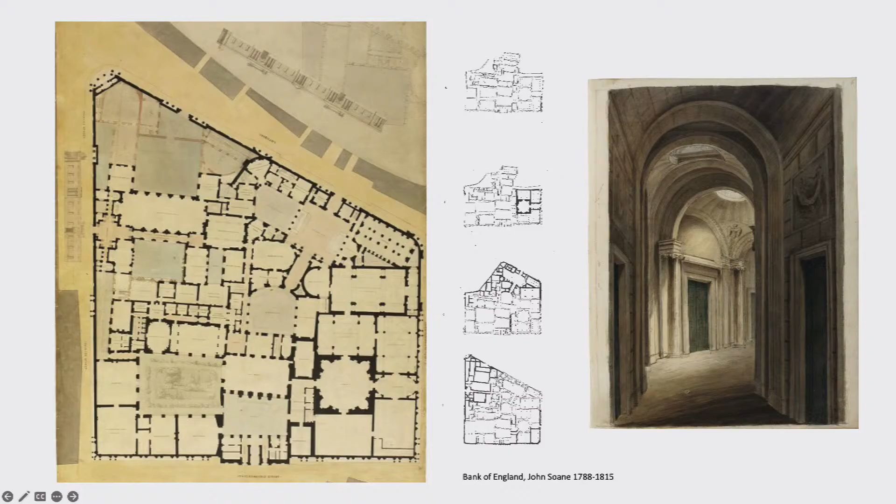I always think that Soane was a kind of revolutionary. He was given the commission of the Bank of England, at the time in the 18th century a powerful expression of control, and he designed a building of great mystery and theatricality. It's a project that, when you understand its evolution, sets up a series of spatial episodes, a combination of the grand gesture and linking passages and, let's say, the unknown.

I wanted to read this statement to you. Setting ourselves the task of rethinking architecture in the early 1950s, we meant by 'as found' not only adjacent buildings, but all those marks that constitute remembrances in a place, and that are to be read through finding out how the existing built fabric of the place had come to be as it was. 'As found' is above all the property of a thing, not the thing itself, and not the activity that produced it. A statement very typical of the Smithsons, somewhere between poetry and critical observation.

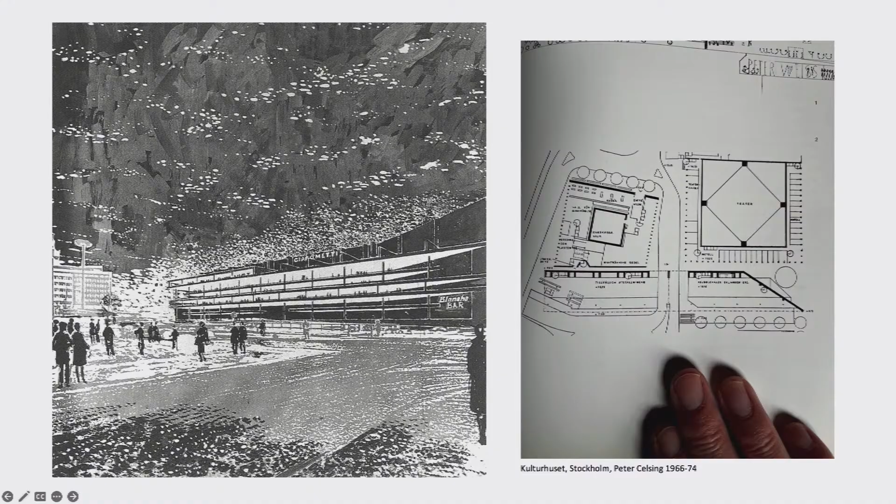In these wonderful collections of essays, he refers to Peter Celsing's Kulturhuset in Stockholm, built in '66 to '74, a project that maybe many of you have visited. I didn't show you the finished building, but you should know it, and if you don't, you should visit it. These were the drawing on the left, from the competition. The drawing on the right demonstrates the combination of buildings, but the long bar that faces the main square. He really was exploring ideas of phenomenal transparency and flexibility, as well as ultimate utility. The thought was that everything could be accommodated or projected within this interior. Everything can be seen simultaneously. We're talking here about the mid-60s. There was free movement from space to space.

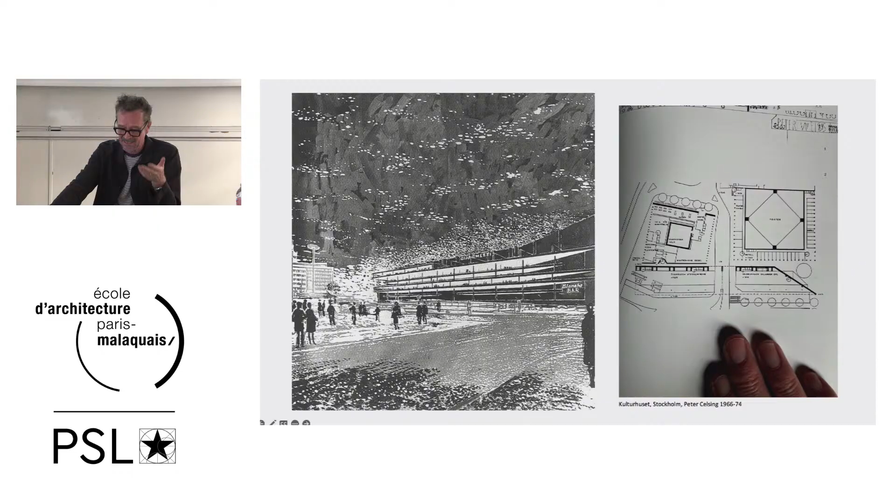And the director of Kulturhuset was Pontus Hulten, who then became the director of the Pompidou. He also believed in the interaction and the agency of people, the public, the freedom to see, the freedom to act, the freedom to intervene.

Mark also refers to the Fun Palace, an unbuilt project of Cedric Price, commissioned in '61 by the theatre director Joan Littlewood. Here the building is seen as a stage. The users of the building could do anything they wanted within the framework of an adaptable structure, with roofs and components that could appear, move, or disappear in response to need.

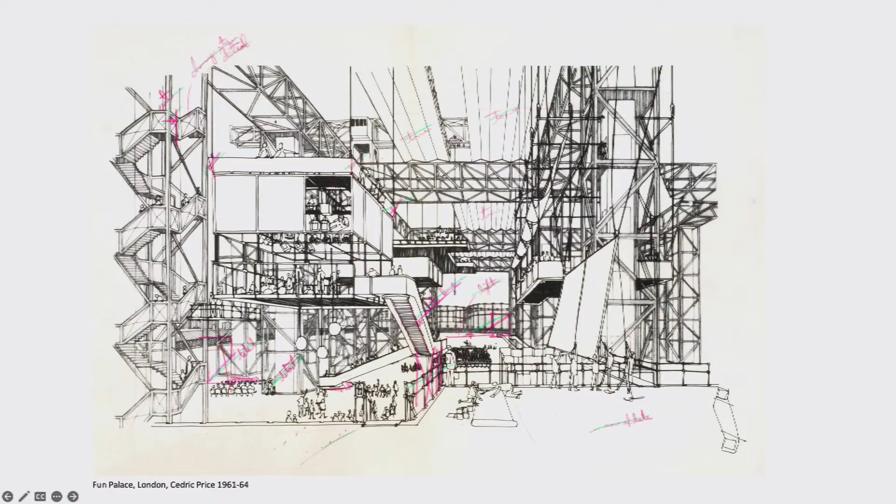There is inevitably, and in a way maybe the first time, a conscious interest in the self-participatory aspect of public architecture. It's also indeterminate, and it also is empty. And I think it was the precursor of Pompidou.

And the third reference that holds importance both in Mark's writing, but in a way what I take from his writing, was of course Sesc Pompéia of Lina Bo Bardi from 1977 through to '86. Again, these projects are 10, 15-year projects. This is extraordinary, how she managed to change and to charge a collection of existing buildings by the reuse and indeed the misuse of what existed.

Emptying out, creating clearings, enabling routes that could be claimed, could be reinterpreted and put to new uses. It is an architecture of simple structures, where the new added work is simple. It gives the impression that almost anyone could build what is added.

And yet the factory, as a consequence, is transformed from a place of work, and you could say from a place of oppression, into one of social interaction. And I think this project led to the Tate Modern of 2000, but also maybe to Frac of Lacaton-Vassal.

All these references show the transformation of a structure of necessity into one that has represented a freedom of use, of movement and association. You could understand it as a sheltering structure given over to new uses, behavior aligned with a feeling of clearing in which public life could be made anew.

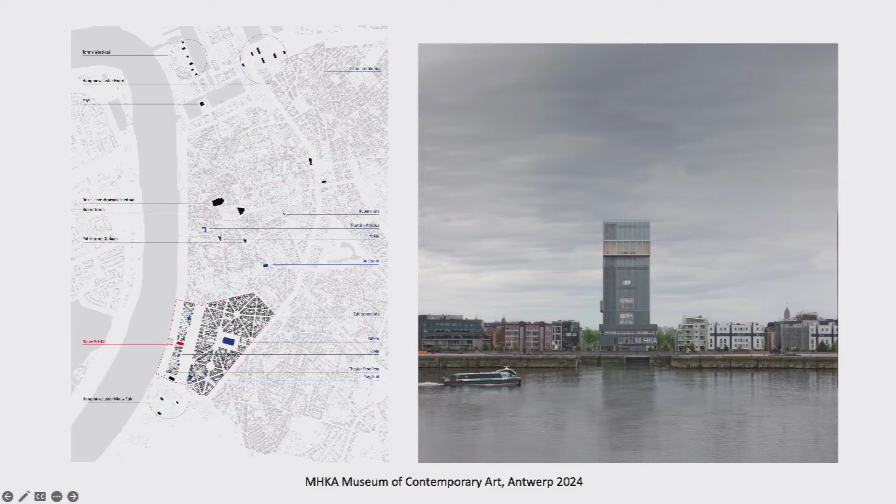They were housed in an existing building which was not conceived as a museum, and they were very local in their attitude. And yet they developed a new brief under new directorship with new ambition, an ambition to make a tower, a vertical museum. A vertical museum, you know, it lies against all typologies, it lies against all references.

A site that takes its place on the edge of the river Scheldt, but within the cityscape of Antwerp. A tower that could be, in our eyes, likened to a harbour silo, which visually asserts Antwerp as a city along the Scheldt, a city of fashion, a city of art. But it could also be a symbol of production, resembling a crane or a tower, but resembling the pride and the skill of the different guilds that the city of Antwerp is so known for. In other words, it could be an addition to a powerful tradition, and it could have a personality.

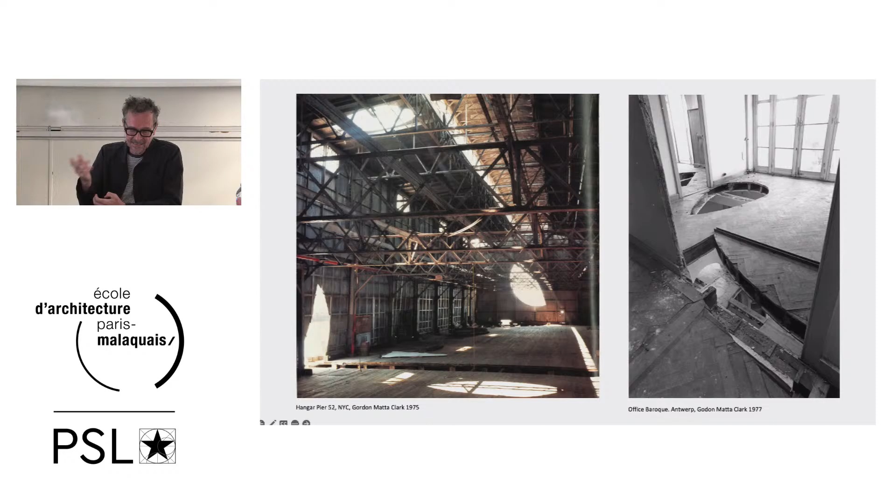In 1975, the artist Gordon Matta Clark created, on the left-hand side, Day's End, by illegally cutting large sculptural openings into an abandoned industrial hangar on Pier 52 in the harbour in New York City. Office Baroque, on the right-hand side, from 1977, was the result of an international invitation by Antwerp to create a similar project, but in an empty office building opposite the city landmark, Het Steen, which is like a castle.

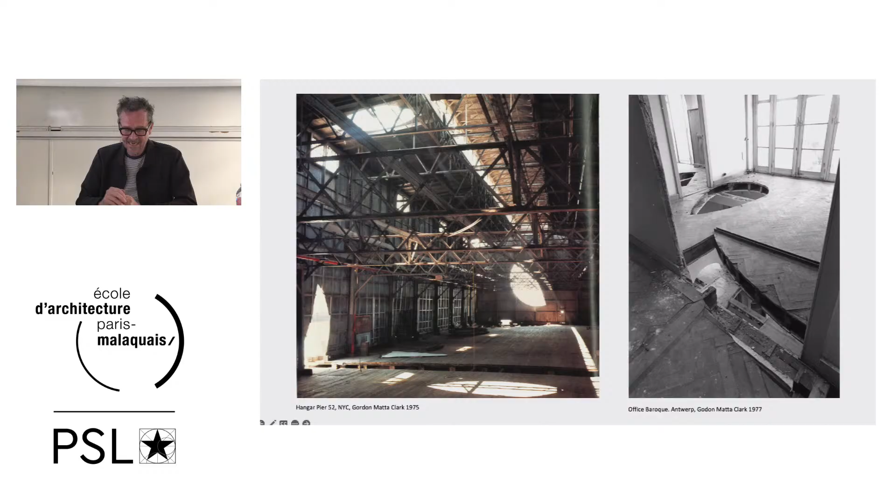After Matta Clark's premature death in 1978, a foundation was created to save Office Baroque. And while the building in the end was demolished, the donations collected from artists for the foundation to save it formed the basis of the M HKA collection. In other words, Matta Clark is deeply connected to M HKA. His work, as you know, or if you don't, you should explore it, is about cutting, but it's about connecting.

The plan that we propose in M HKA was also about connecting. It was built on the ground, the building bridges two parts of the city, the River Scheldt on the left-hand side and the South Park on the right. It is porous, it's accessible from all sides. The public space flows in and out. It has multiple entrances, it's connective.

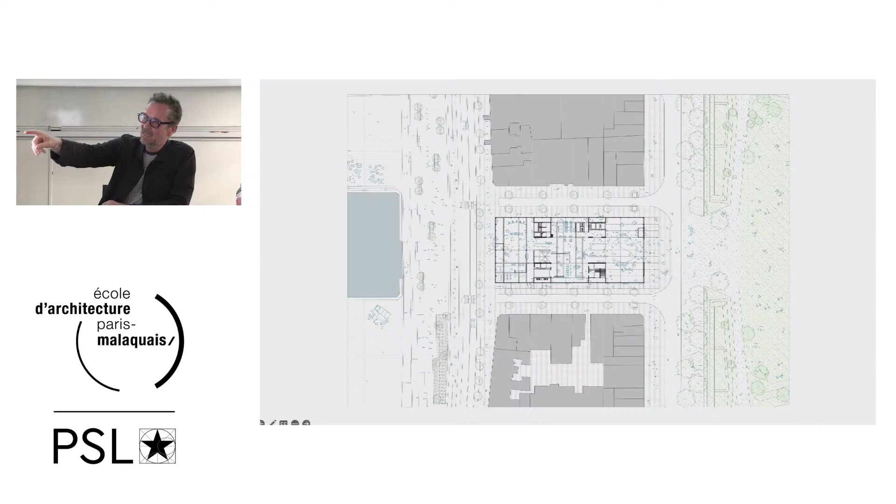It's the size of a city block, and it demonstrates a plinth which is public, a plinth which reaches out and draws in. It also, in fact, in our proposal, had a barge that was moored on the river. And so the museum, through this flexible barge building, on a building on a barge, would be able to sail into the city centre. So the art could come to the city, not just the visitor come to the art.

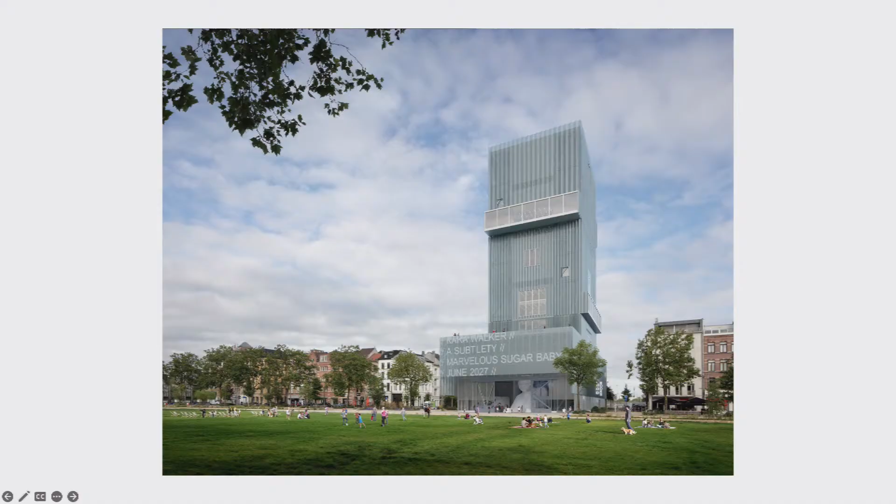This is a place, we thought, that opens itself to the city. There are no thresholds. So unlike the traditional museum that sits on a platform, the ground floor of the museum is at the ground level of the street.

It offers a generous exhibition hall, which we call the hangar, a spacious public hall where everyone is welcome, a space which is both for production and for presentation. And above this hangar, this plinth, an 80-meter high tower forms this powerful ensemble. You could say an ensemble that is more an infrastructure. And you can see in the image a piece by Kara Walker, an opportunity in this hangar to show extremely large work.

I mention this infrastructure because we saw the building as an infrastructure. We presented it at the final jury as an unfinished building, an offer, an opportunity that lies in 6 mega floors with primary and secondary structure that gives flexibility of content. It can be arranged in different ways due to the symmetrical construction of floor heights. And it's visible on the waterfront as an infrastructure.

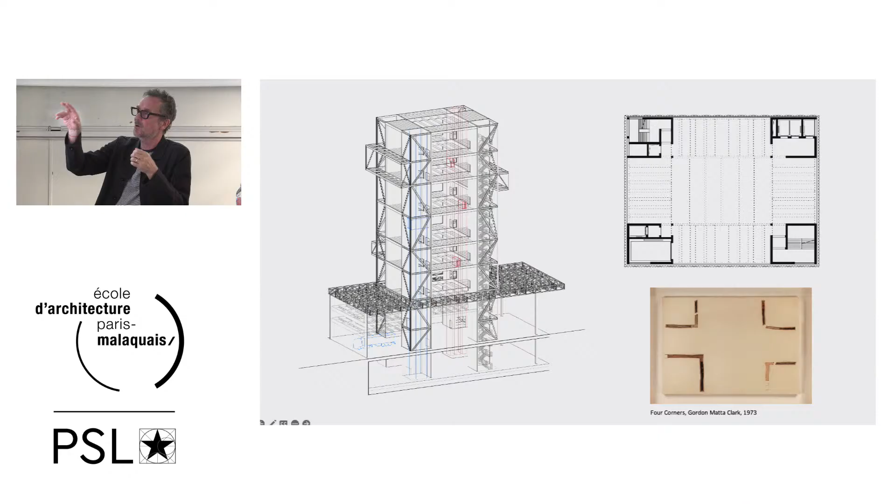Combined with, on the left, you can see in red, a kind of plug-in, decentralized HVAC system. So you could control the environment, the climate of individual floors. I mean, you have to remember here that a museum is the most unsustainable building type that exists. I'll come back to that later.

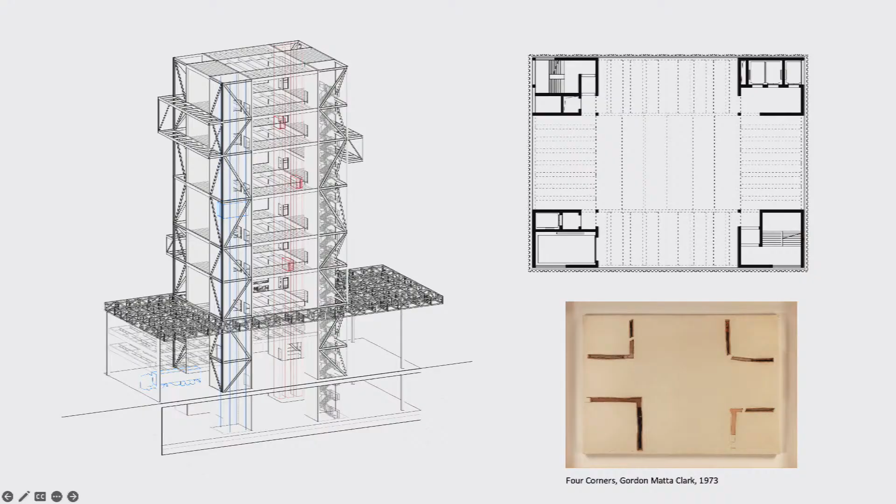The hangar at ground floor offers an immediate encounter with art. It is multi-directional, it's 70 meters by 30 meters, divided into 3 sort of spatial areas. There are no escalators. It shouldn't be a symbol of consumption, but a symbol of production. It's 16 meters high at the front, 12 meters in the middle, 7 meters at the back.

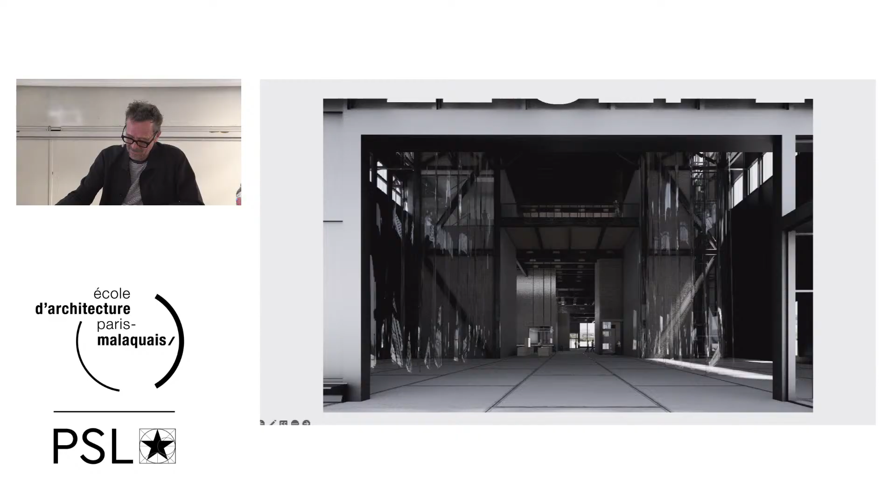And from the central vestibule, an internal window reveals the basement gallery below. These sections show this idea of a primary and secondary structure and a typical way of arranging that structure, giving spatial opportunity for exhibitions to be organized in different ways, working with this 12-meter high primary structure.

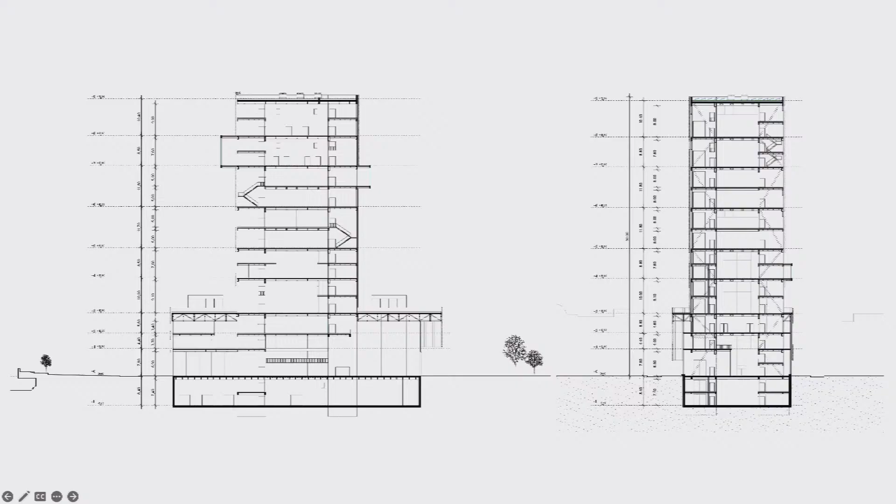And on top, this structure straddles over an existing water lock, which is preserved as a found relic, but in fact it's a gallery, an underground gallery with no daylight.

In this sectional perspective, we poured the brief into the structure, the program offered at the competition, because we knew it would change. We felt the building was too big for the museum, their ambition was unrealistic. So we demonstrated how their brief could occupy the structure, but also revealed other ways of using the building alongside a place for art.

You can see the auditoriums stacked on top of each other, all forming part of a journey, a route, with at the time the permanent collection, their most treasured possession, on top of the building, and the temporary galleries above the auditoriums with overflow spaces between.

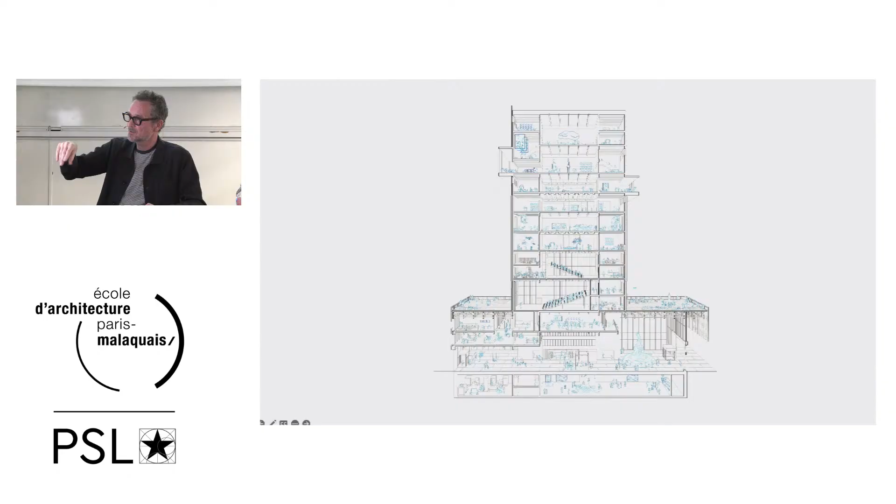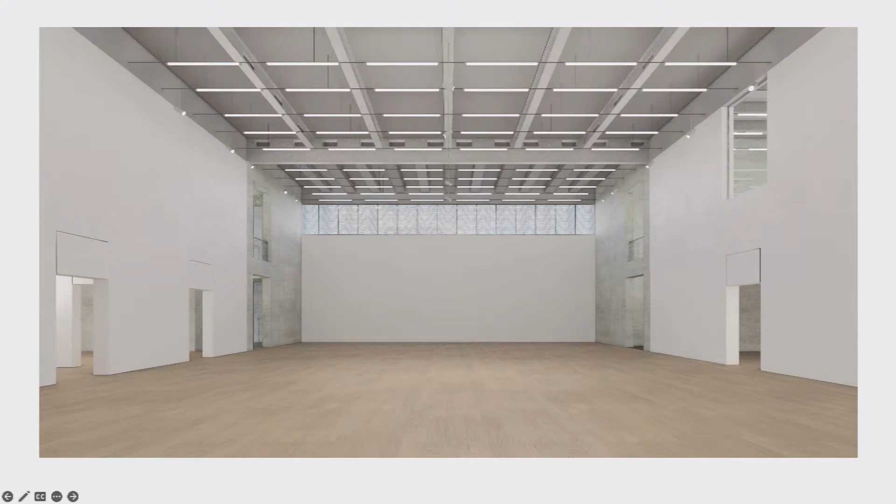On the top two floors, we presented these shell-like spaces. You can see on the right and left, in concrete, the open corners, just to reveal that to those looking at the image, and a typical arrangement using the permanent collection elements.

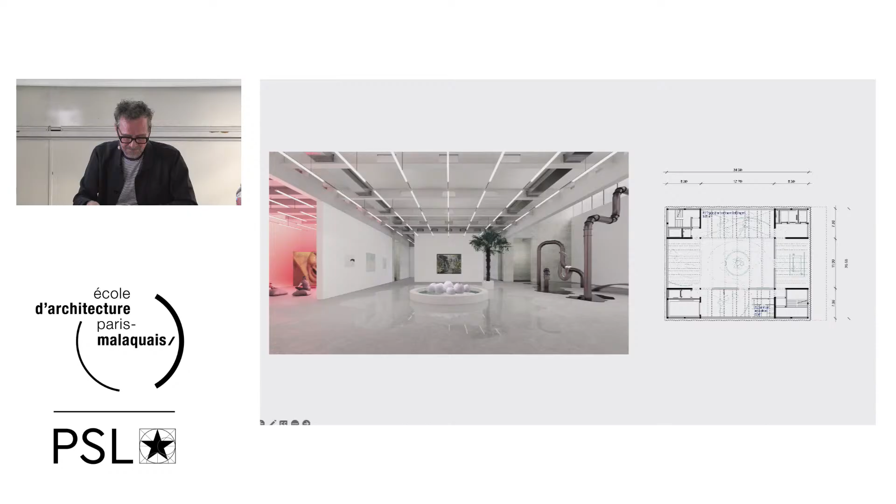In the middle floors, the more transient gallery spaces that could take the visiting exhibitions. The facade, a veil, which grew out to create overflow spaces and open corners in the staircases, places for visitors to pause mid-visit, to reorientate, to meet a friend or so.

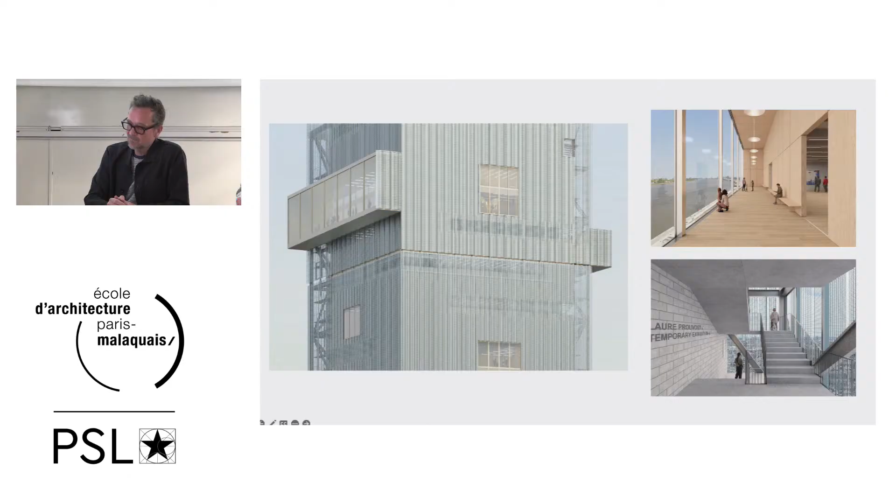The facade comprised three layers: an inner layer of hygroscopic heavyweight block, visible in the stair, to provide thermal stability and moisture buffering, a middle layer of insulation reducing temperature change, and an outer layer of perforated metal sheets upcycled from waste material from the dock industry, acting as a veil providing shade and wind protection to the thermal enclosure.

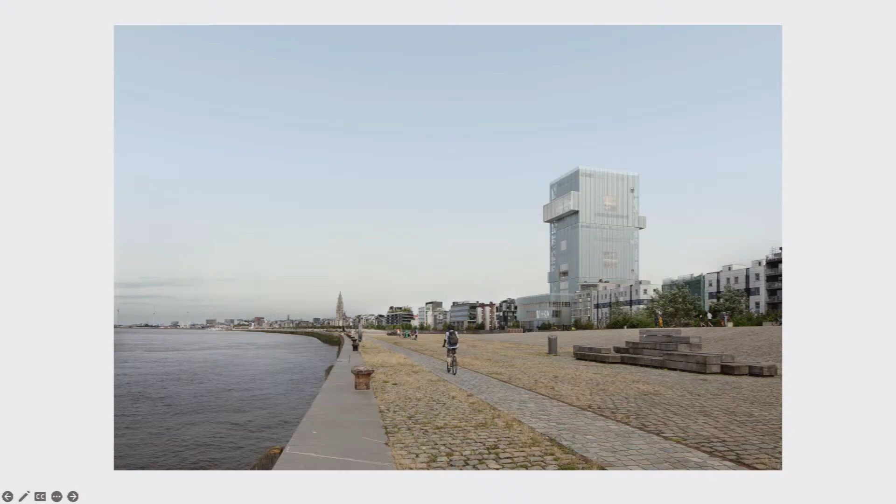It's a facade that presents itself as a symbol from afar, a brightly colored container. At night, open, a public destination, perforated, revealing its interior. And close up, a layered, open facade, reaching out, drawing in.

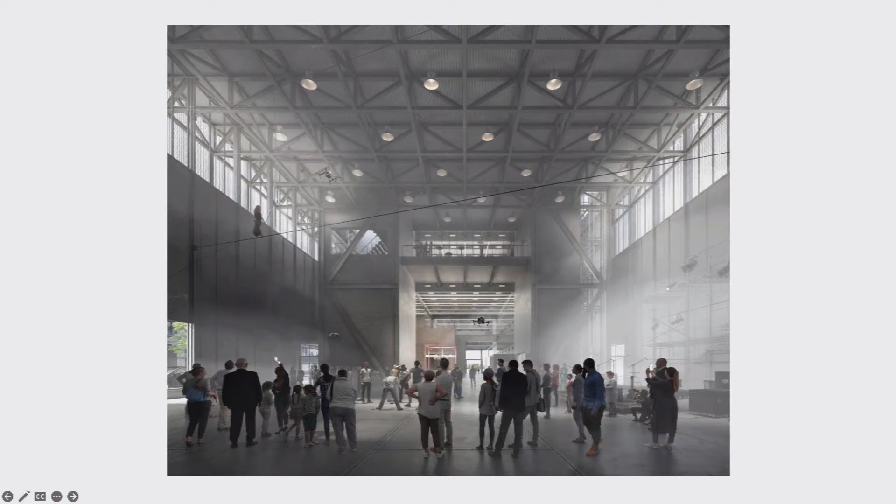In this image, you can see the plinth measured at the scale of the existing housing. Streets either side provide some of the many entrances. And within that plinth, the hangar, which embodies openness. It's vast and flexible and unpretentious, and it invites spontaneous encounters.

We imagined that the hangar, and by extension M HKA, was a civic third place where art intersects the city. And I think these kinds of porosities redefine the museum as a lived infrastructure rather than as an isolated cultural container.

The second project I wanted to show - I didn't explain, but the first project was made in collaboration with the same team who are building KANAL: noAarchitecten from Brussels and EM2N from Zurich. Our collaboration has been so fruitful that it naturally followed into other collaborations, and that was another opportunity.

This project for the Leuven Performing Arts Building is being carried out by our own office, but together with a technical architect from Antwerp.

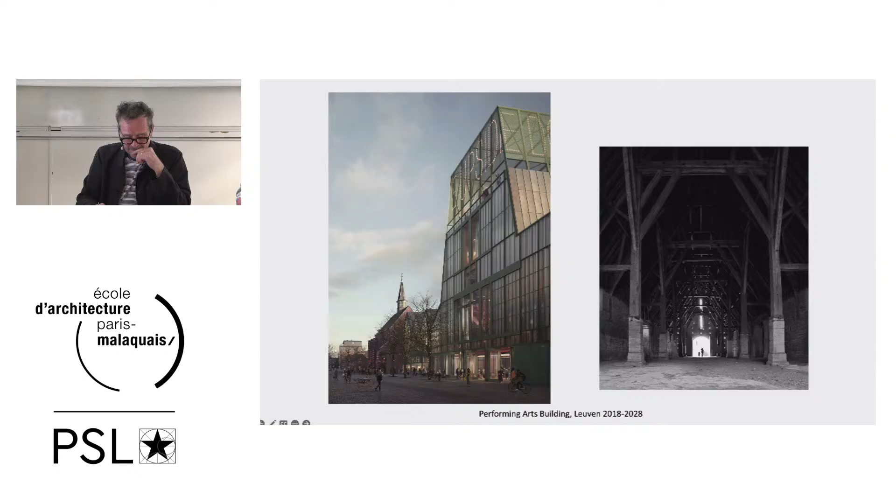It resembles an open market hall. It presents the idea of a flexible and adaptable infrastructure with a kind of resilience of a barn. On the right is a very important barn to me, the Great Coxwell Barn, a building I think was the first bit of architecture I ever encountered as a young boy with my father.

But we imagine this theatre or building as a hard-working tool, a structure and a hull. It was robust in its form. It had a crafted lattice structure and delicate outline to the sky, because it needed to be a landmark. The city wanted a landmark.

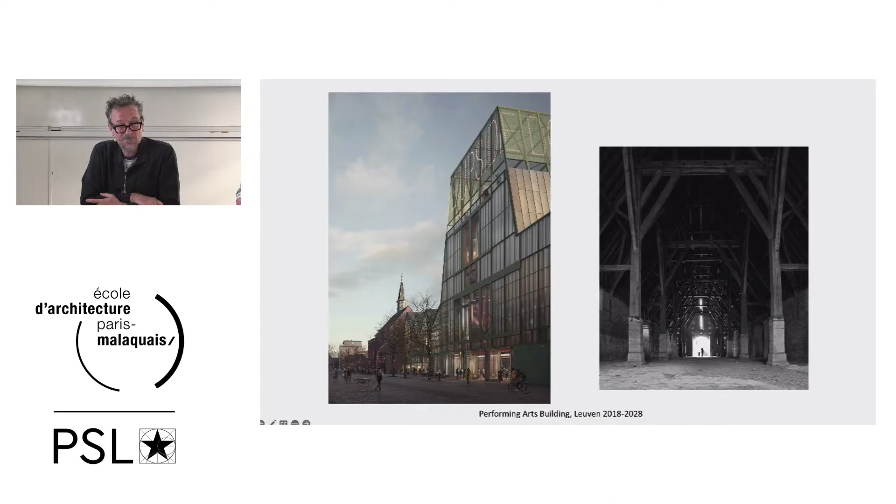This is new to us, how to make landmarks, when, as Margot pointed out, our instinct is always for quietness. This needed to be a point of cultural orientation along a cultural route.

The Flemish theatre critique Marianne Van Kerckhoven describes the theatre as in the city, and the city is in the world, and the walls are made of skin. She was indicating that the theatre is porous. It should be breathing and intimately connected to society.

And the new building that one makes is adjusted and molded to resonate with what is around, while generating extraordinary spaces. We were looking carefully at references, especially the Teatro Oficina of Lina Bo Bardi and Edson Elito, in which the street is allowed to invade the scenic stage. It blurs the boundaries between the stage and the audience.

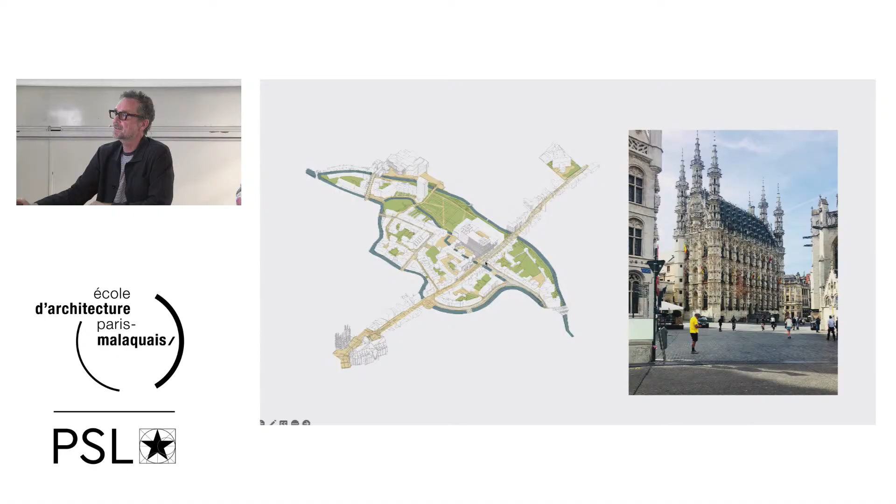In a similar way, the new theatre is designed to expand into the public space of the city, reaching out, drawing in, dissolving the thresholds between the public realm and the space of the theatre. The theatre is here along the main Brusselsestraat with the Stadhuis illustrated on the right, alongside a new park that's being developed at the moment.

A building by David Chipperfield here, and in fact we've just finished a building here.

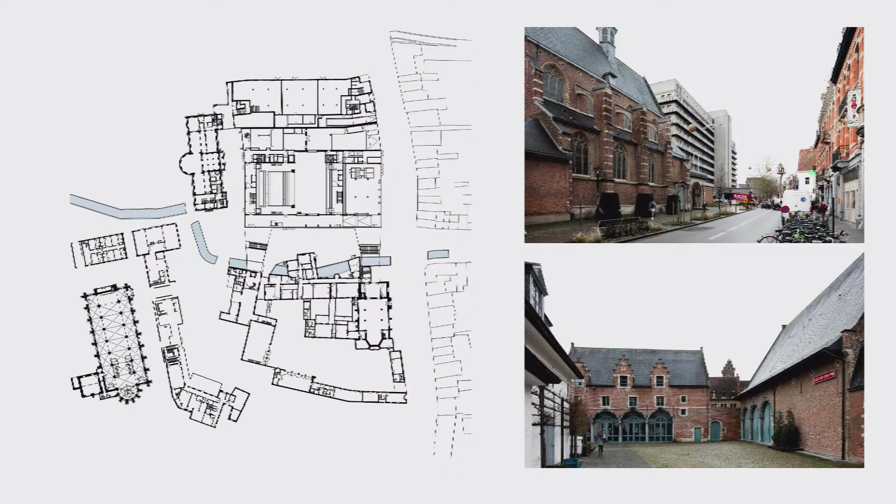We were really interested in how in this medieval city of Leuven, an ancient university city with many historically religious buildings, monasteries, cloisters, churches, how beautiful they are stitched together into the city. They create extraordinary character through the spaces between, the linking spaces, and we were really interested in how we could extend those spaces from this Romaanse Poort monastery.

This is the theatre here, and an adjoining housing development with an existing building here, an existing church. How we could create an extension of the public spaces between, from courtyard to passage to alleyway, creating a kind of cross-fertilization, in particular between this Romaanse Poort monastery, which is now an art centre, the 30cc art centre, and the new building, and indeed this church, which is used by a circus company for rehearsals.

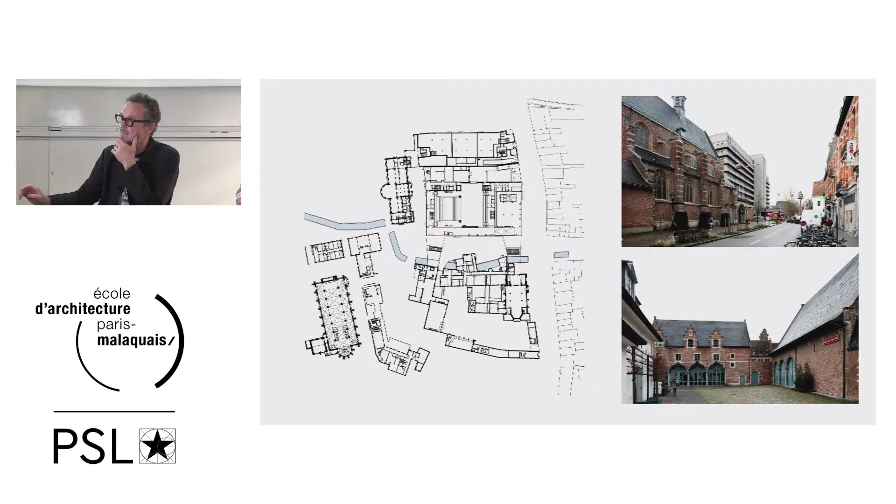Together with those cultural connections came an interest that the city had, that we were very happy to help with, to open up the river Aar, which is a tributary from the main river in the city. So this is all at the moment underground, but the intention, it is already now open through the work that's the early work before construction of the main building starts, but this extension of the network of water space.

The facade of the new building kind of unwraps itself from the existing monastery and rises to form this profile, in a way, therefore, achieving a kind of continuity with the main Brusselsstraat street running along, if you could say, a cross-section through the city.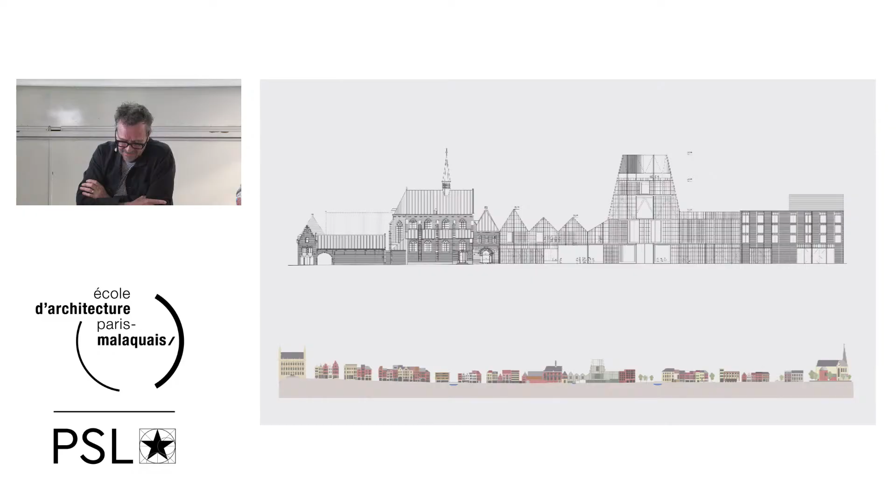And these undulating roofs and bridging elements connect new and old at the first floor level, and they therefore provide, in fact, integral accessibility that didn't exist in this building. So there's a kind of, not only there's a cultural connection, but now a physical connection that allows the theatre and the art centre to form a single unity.

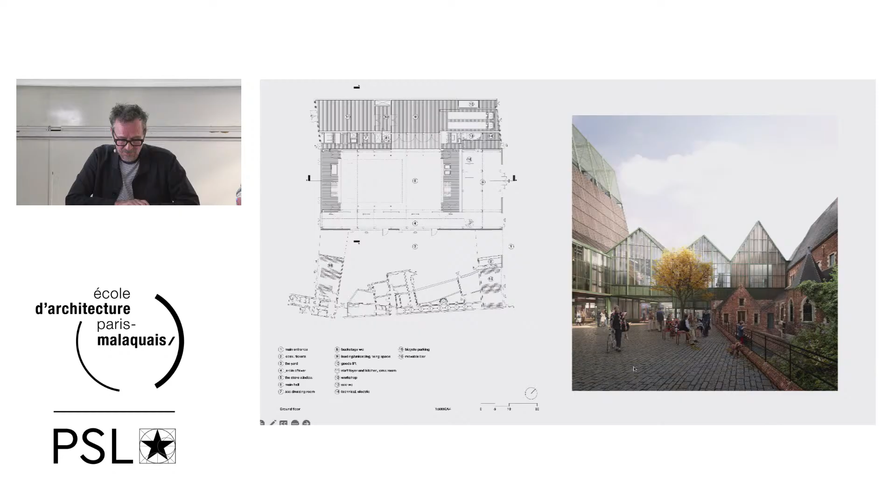Between a new yard, so this is the plan of the theatre, the river, you can just see the river opening up here, and this new courtyard, which is illustrated on the right. And what this yard did was allow us to open up the theatre along its long edge, which is extremely unusual, where theatres are usually progressively linear in their organisation, from the street to the tickets to the bar to whatever, toilets, into the main theatre space.

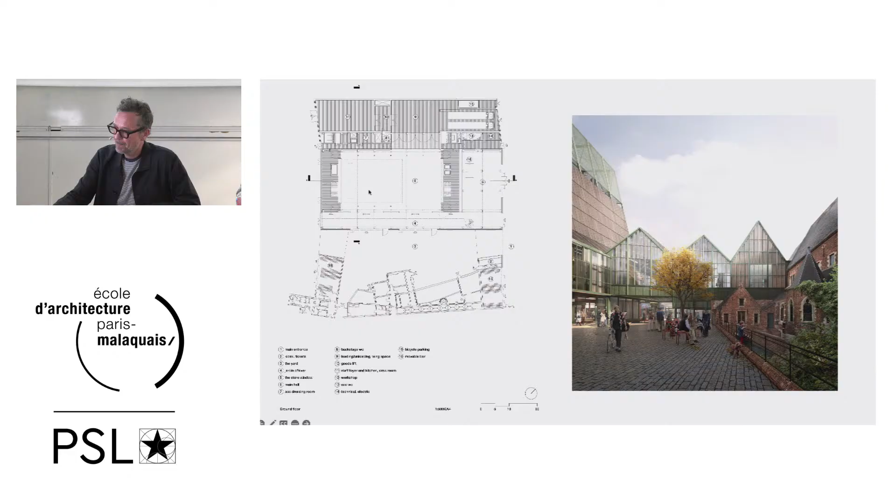But by reorienting the building via this courtyard, you could enter the building at any point, including directly into the main theatre space. So there's this powerful idea of the courtyard and the stage becoming a single piece of public space.

And that is the transition between the two, is this space, which we call the jardin d'hiver, connecting the two cores, but becoming a kind of interstitial space between the main stage and the garden. It's 68 meters long, and it provides a public space and, of course, when necessary, an acoustic separation between the sensitive areas.

At basement level, there are green rooms and toilets, and you can see on this first floor that the bridging elements become linking arms that extend the jardin d'hiver across into the existing building.

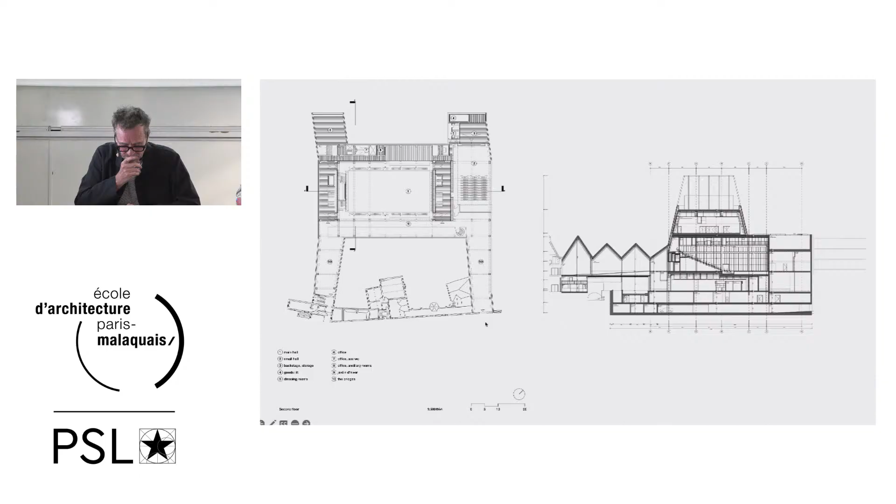So this is the jardin d'hiver with the courtyard on the right, and this connection at ground level and at first directly into the theatre space. It acts kind of as a foyer, but it also can itself encourage performances and activity that are directed directly towards the outside or as part of the interior.

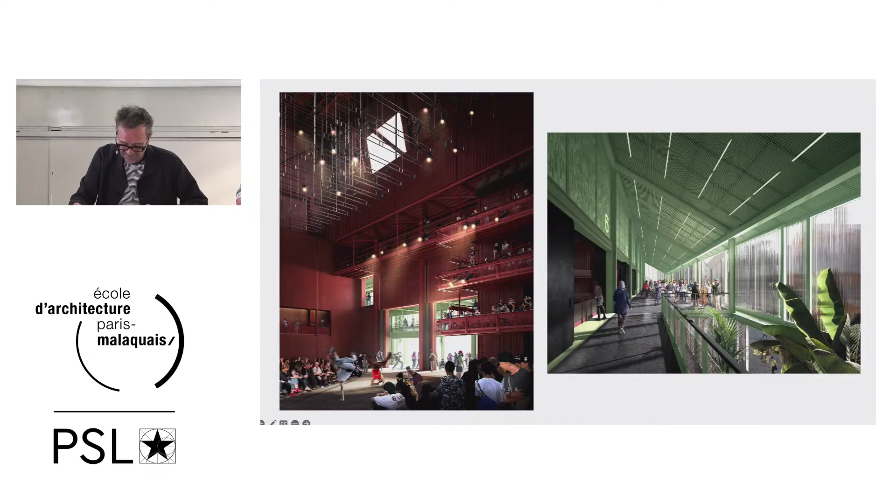And the hall, a great lofty hall that boldly expresses its architectural structure, exposes technical infrastructure, and offers full artistic potential. It's an event space that can be much more than a place for theatre, a place for a book fair, or a club, or a gathering, as well as a traditional theatre condition.

But to provide flexibility is easy to say, but is fundamental in the way the character of the consequent space is. Because if you are able to have a travelling performance of Jesus Christ Superstar, or a gig, or a chamber orchestra, or a play, all in one space, those of you who know that that acoustic requirement is fundamentally different. So to make a fundamentally flexible space, we actually had to create an artificial environment.

This was achieved by using what we call an active digital acoustic constellation system. That means an ability to change the acoustic properties of a room electronically by modifying the warmth and reverberation of sound to suit the requirements of any type of space.

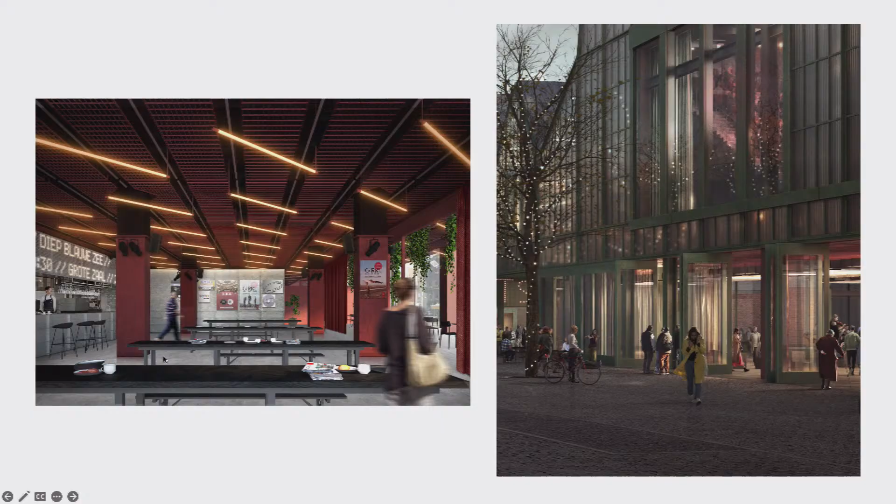And on the ground floor, what we call a live room, a shop front to the venue, a place of invitation that forms part of the public realm of the street. It is as much the community's as anyone else's. It's a space where you can spend time freely, buying coffee, a bar at night, a place to work and log in for watching activities of production.

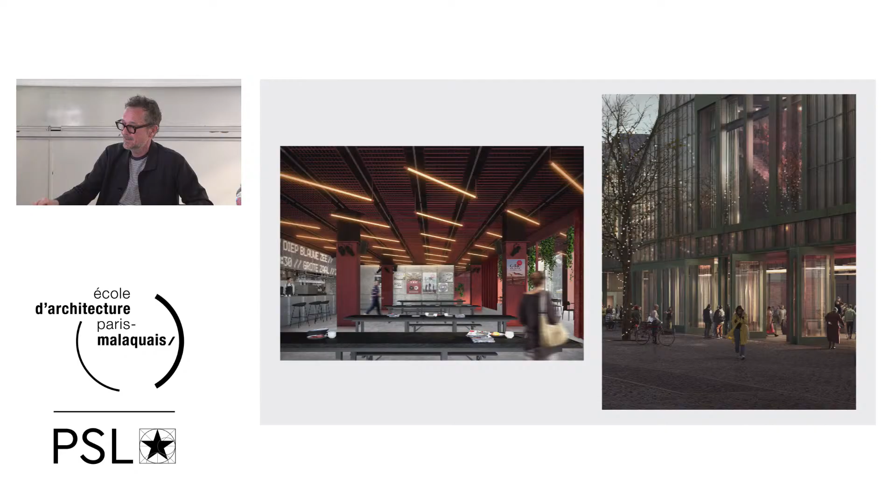And above that, the second performance space of 400 seats with a large window overlooking the city that can also be completely closed off. This space connects directly to the Jardin d'Hiver at first floor level.

And above that, other rooms for rehearsals with a sprung floor, a dance floor for the circus group who are going to use this building, and another multi-purpose space in the middle at the top with a bar, the green room at ground floor on the right, all connected by these two cores.

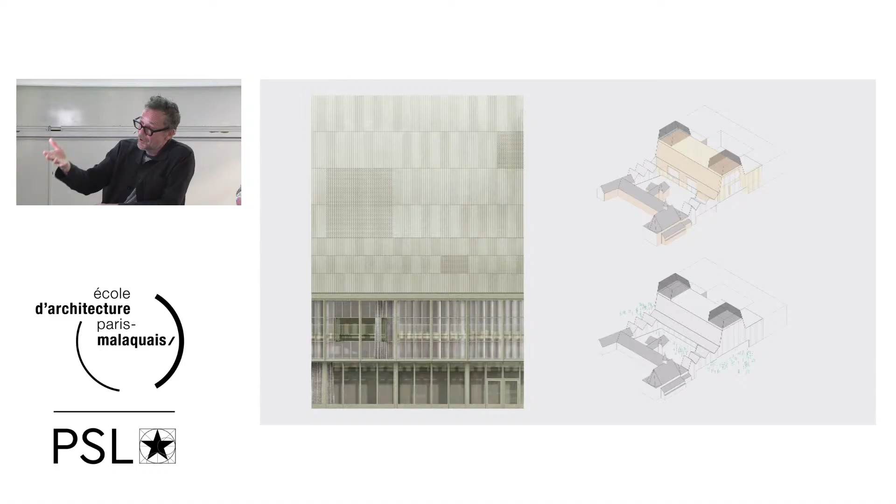We understood that this was about a building within a building, and the concept of the facade was about two layers: an outer layer like an outer shell of glass, and an inner shell of masonry, providing protection against noise from inside and outside. There was, in a way, a third, more flexible layer of curtains added on the inside. It's a layered concept that ensures an appropriate and specific solution can be provided for each part of the facade with respect to the various technical and aesthetic requirements.

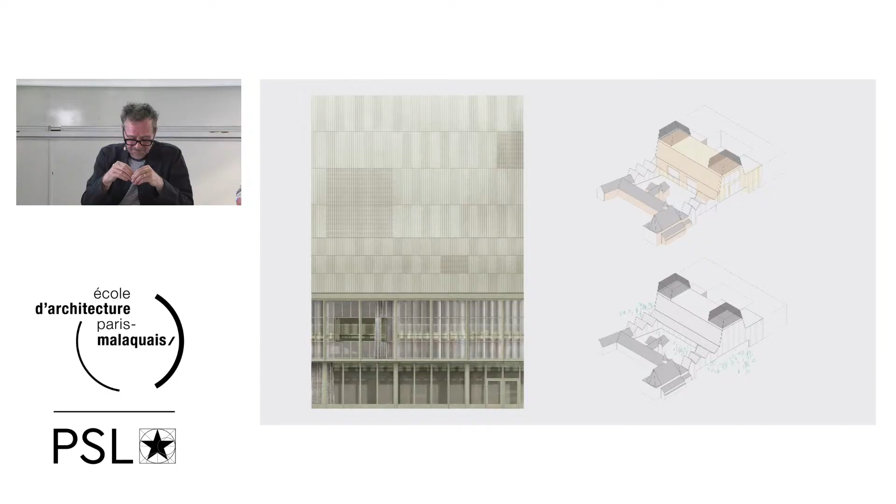But its face to the city is a delicately fluted glass facade with metal profiles that unfolds across every surface. You can see a working model that illustrates that kind of shifting of the solid against the transparent. So within this singular form, there are other forms that you begin to perceive at different times of day and at night behind this kind of veil.

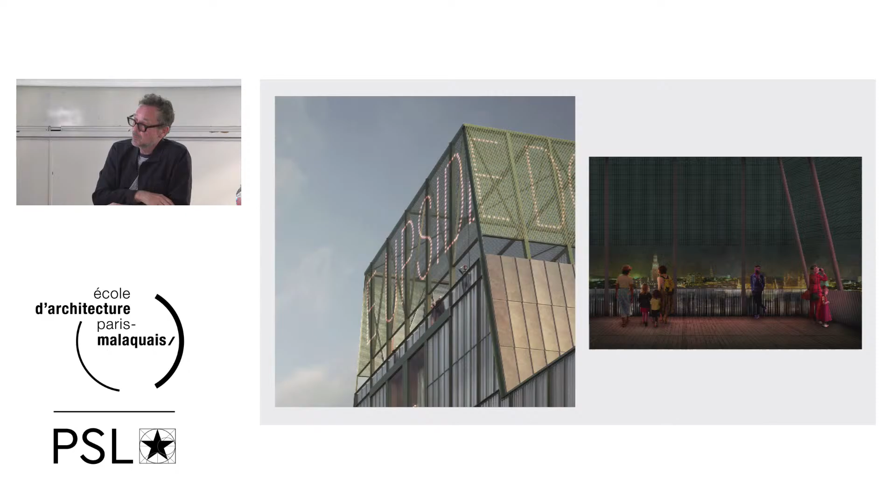And on the top, you can see in this model a roof terrace, publicly accessible directly from the courtyard or through the building. You enter into this mesh, this sort of framed space that provides some sense of protection and framing views over Leuven, and also supports a digital artistic installation.

The final project I wanted to show you was this ongoing project in Brussels, the KANAL, as we call it - the Modern and Contemporary Arts Complex. It is housed in the former Citroën car factory that was built in 1933, and it comprises an iconic showroom and a large factory space behind.

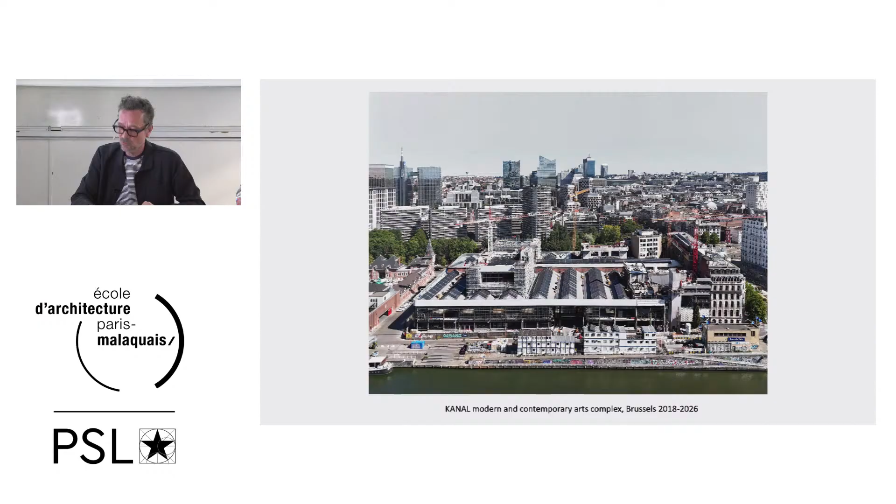It's the size of a city block, and we're transforming it into a generous public interior, focusing on cultural production, which houses visual arts, architecture, dance, drama, film, and music.

KANAL is an exemplar of reuse, and the Citroën garage was our starting point - a place as found, located alongside the canal and within walking distance from Brussels city centre, a building plot of 100 by 200 meters, almost a complete city block, which we felt offered unmatched opportunities that would be impossible to achieve with a new building.

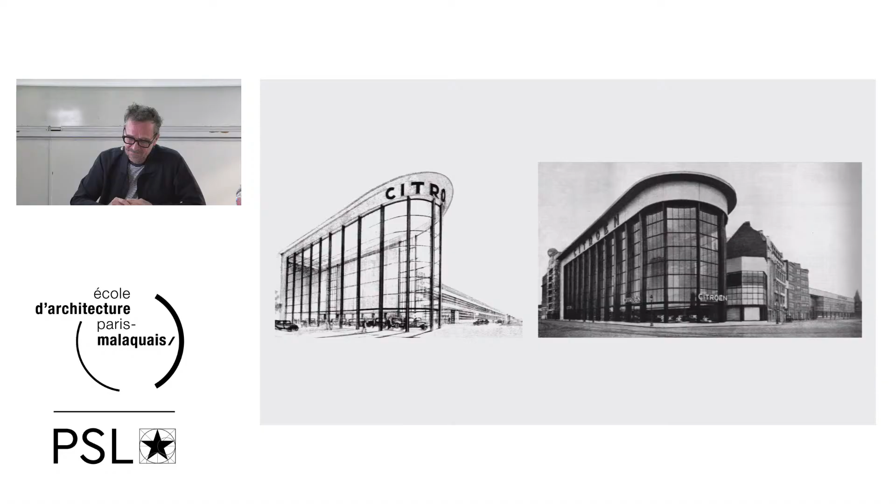Rather than a spectacular gesture, our proposal offered an attitude of radical optimism. It was about being open and non-prescriptive, about being spontaneous and instinctive, which we felt was much like the spirit of modern progress in which this building was first created. In so doing, we allow the original building to become once again a key protagonist in the city.

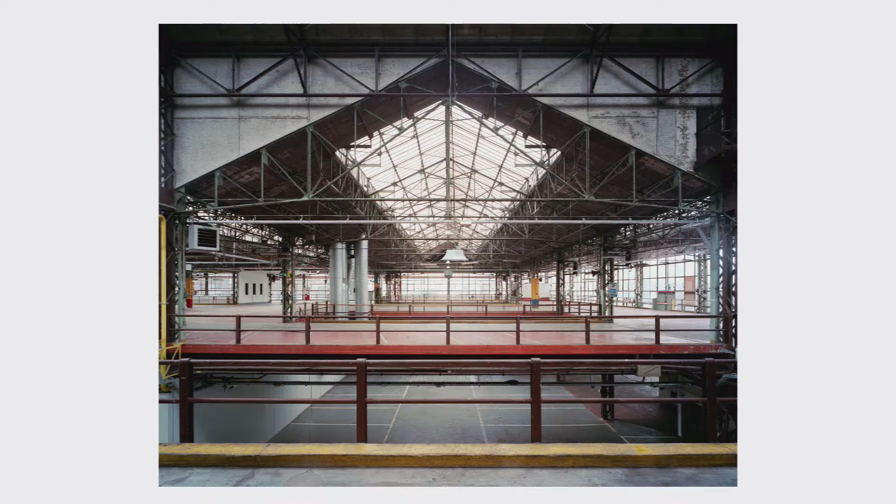The interior is a fine example of elegant industrial engineering. The glass facade is also a clear expression of its early modernism. It has already experienced many lives.

Our ambition as we set out on the project, which we won in competition in 2018, was to trust the building as we found it, to embrace its industrial character and its many layers of use, to transform it with a light touch and a deliberate economy of means, but to add as much as to take away. It needed new elements; it needed to transform from something existing to something new. It's an attitude that led us, both conceptually and in detail, in every decision.

This first visit to the building, as you see it here with its cloud-like roof, it was extraordinary to experience such a big building made of very small elements.

With KANAL, the conventions of the signature building by one celebrity architect have been challenged. As an architectural practice, we founded three offices, EM2N, noAarchitecten and Sergison Bates, founded Atelier KANAL. One name, many hands, responsible for both the architecture and the interiors. These were delivered with a generous sense of shared authorship.

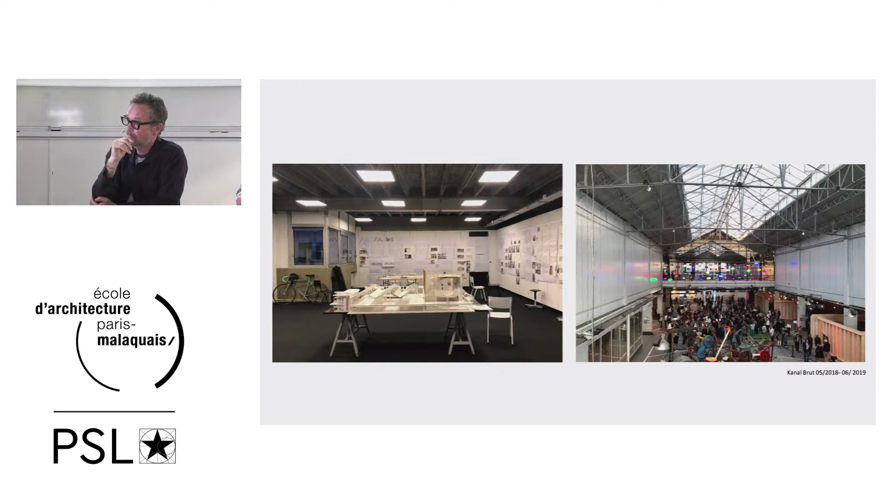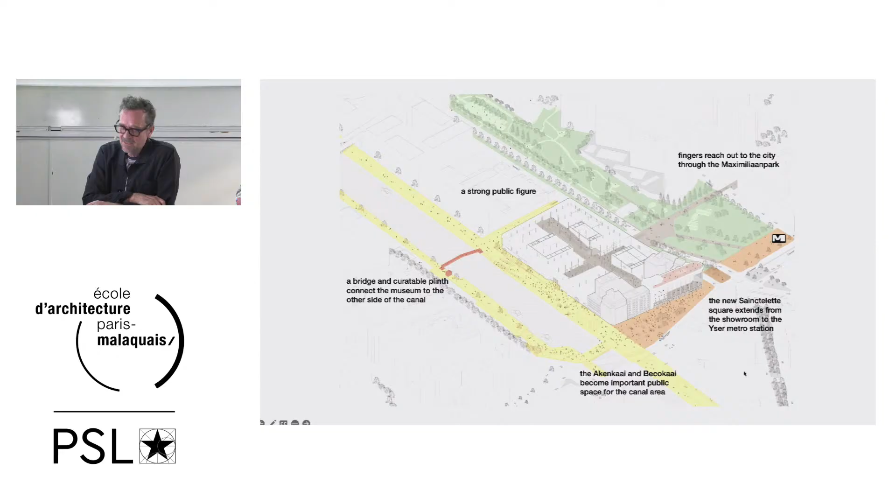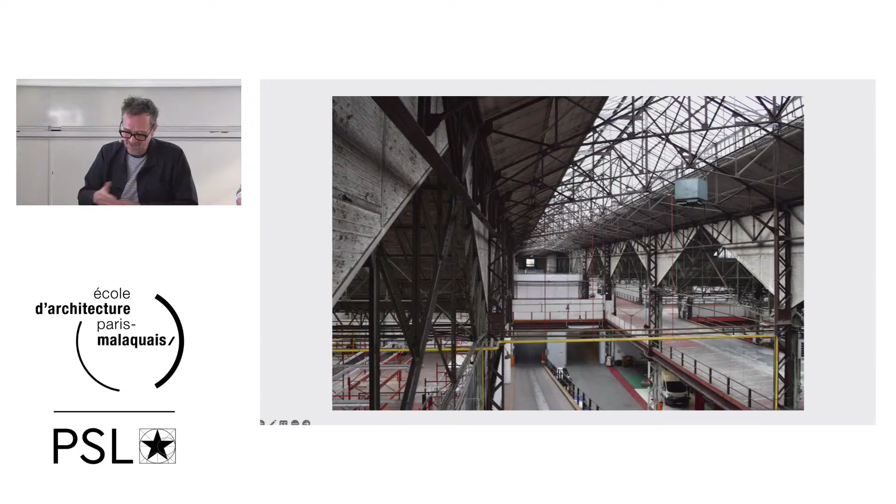before they closed the building for renovation. The existing cross-axis of 18-meter wide streets that cut through the former factory and showroom have entrances at each of their 4 ends. They connect all the activities of KANAL and they reach out to the city beyond. Together with the Piano Nobile, this platform added in the 50s, not from the original construction, a level added for more parking at the time within the garage. The streets and this first floor platform cover nearly half of the total area of the building, and they offer unclaimed public space in which institutions, artists, citizens can appropriate.

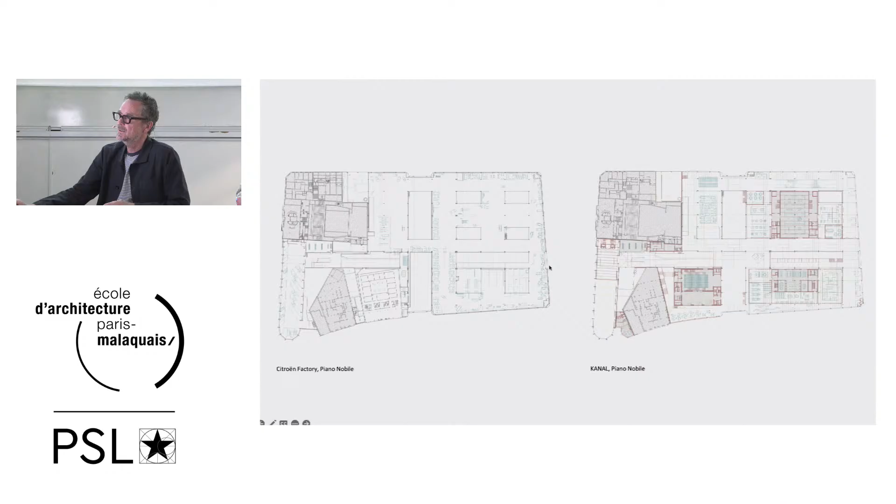The museum is not only a new international beacon in the city, but above all a meeting place for the super diverse neighborhood and the city it forms part of. For example, the ticket office is not the first thing that you see. Visitors can wander through the building via the wide streets, designed as a continuation of the surrounding urban fabric. They can naturally flow up the existing ramps to the first floor, to read a book, to do their homework in the library, to meet with others, to sit down somewhere.

We call it a third place, as was originally formulated by the urban sociologist Ray Oldenburg in his 1989 book, The Great Good Place. This refers to a public space where people spend time other than home, which is the first place, or work or school, the second place. The third place is a familiar place which doesn't have the necessity for consumption. It invites the public, the people, to appropriate, to inhabit the project.

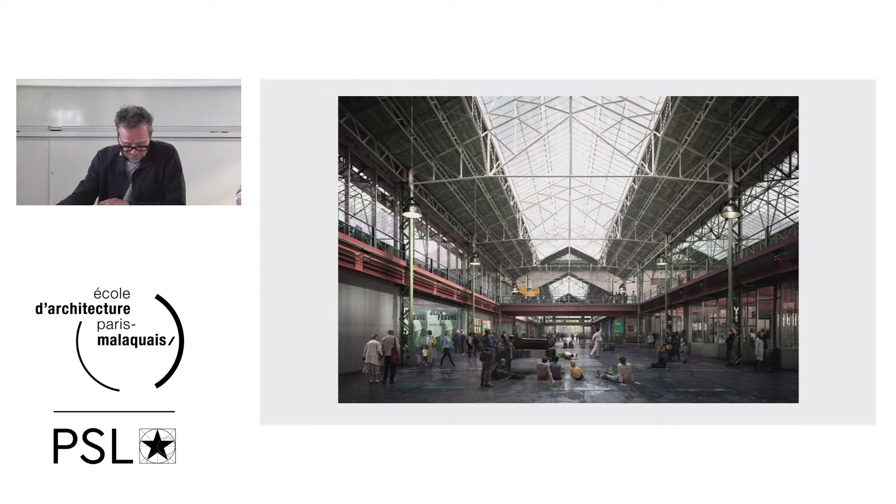45% of the project is completely free, open to the public. Only the galleries are ticketed for exhibitions. So this approach means that the museum no longer belongs to the curated art, but becomes part of the city. And we enjoyed the way KANAL departs from the traditional museum, offering instead a place of civic gathering.

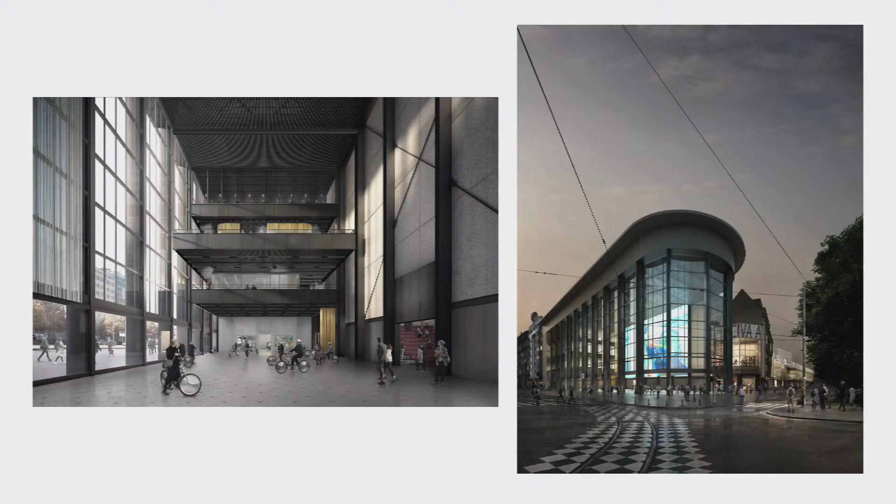Oriented towards the city centre, the iconic former showroom, a 24-metre high glass and steel structure, is pretty much restored. It was the symbol of Citroën. It's known by everyone in the city. It now becomes KANAL's public image. It is, as we described it, a new stage for Brussels.

We restored and transformed it to give it a similar grand urban interior character that it used to have. Large sections of the ground floor can be opened up with guillotine windows to allow the new Sainctelette Square to flow directly into the building. Most of the time this space is unprogrammed. It is, in the end, a public covered square open for installations, performances, etc.

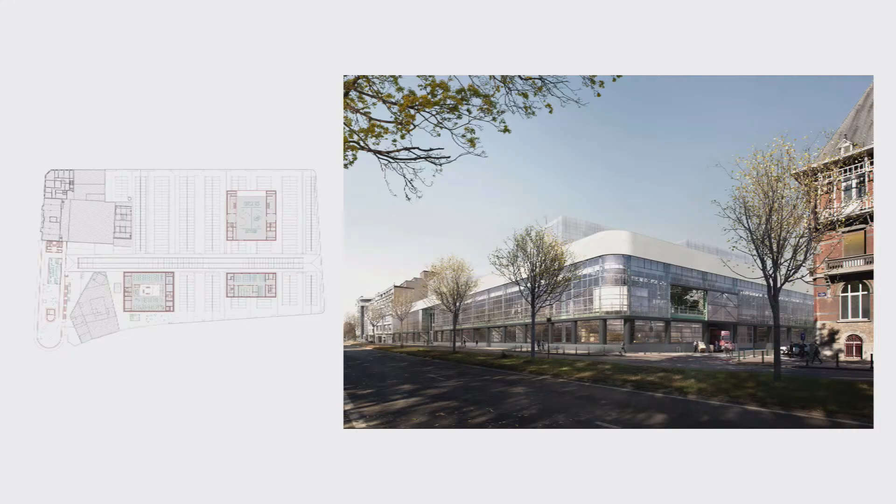As this existing car factory with its thin shell could never meet the structural, climatic or acoustic performance of a high-end exhibition space, a brief written by Centre Pompidou here in Paris, we added 3 new houses which are inserted into the expansive volume of the existing structure. Here's one of them prepared. One accommodates shared uses that we call the rassembleur, such as auditorium and offices for the theatre, for the institution. Another, the KANAL architecture, formerly the CIVA Architecture Museum, and the third, the new Museum of Contemporary Art.

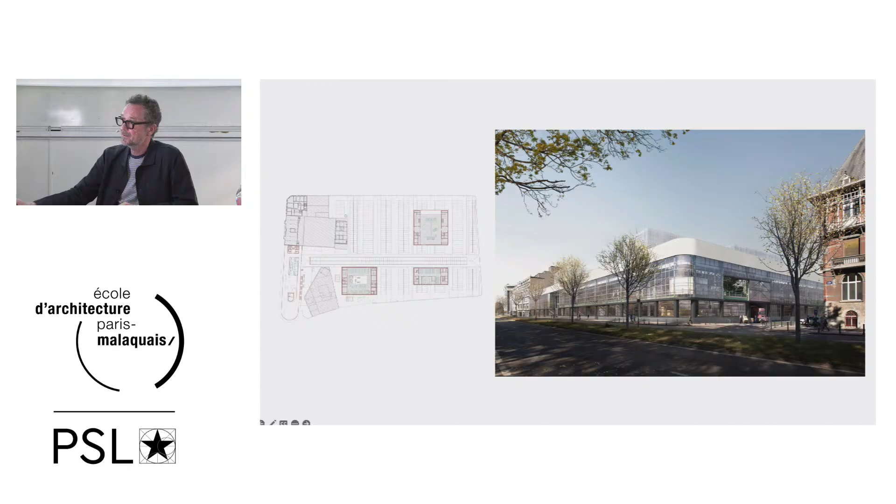On the left, you see the 5 levels of the museum, offering column-free gallery space, each floor about 725 square meters, each with different ceiling heights, different finishes on the floor, allowing potential for different scenographies and connections via the cores on either side.

There's a 7-meter high basement gallery for video or for other performance, with separate access from the street, so you can go directly from the canal side into the basement, part of the building. These galleries allow a combination of daylight or artificially lit spaces.

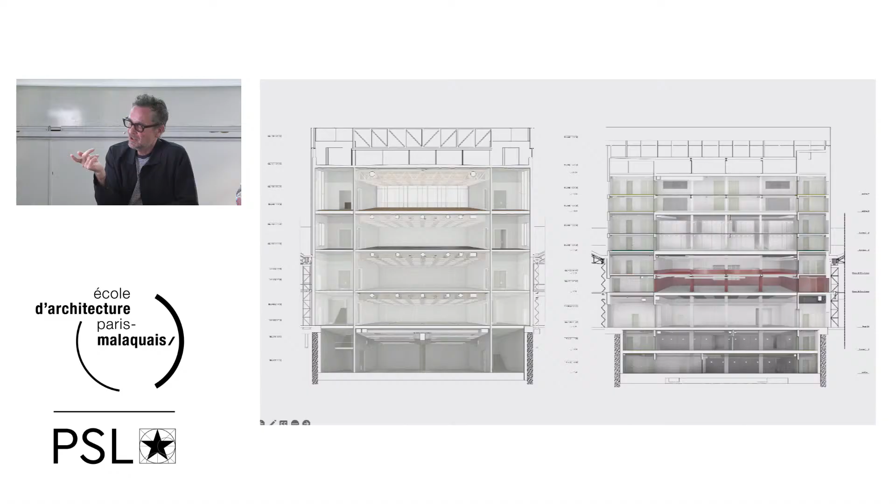On the right, the KANAL architecture, the CIVA, containing exhibition spaces on the ground floor, and the very valuable archives on different floors with a consultation center illustrated in red there, with a silent library adjacent to it for research. And the energy strategy for such a building...

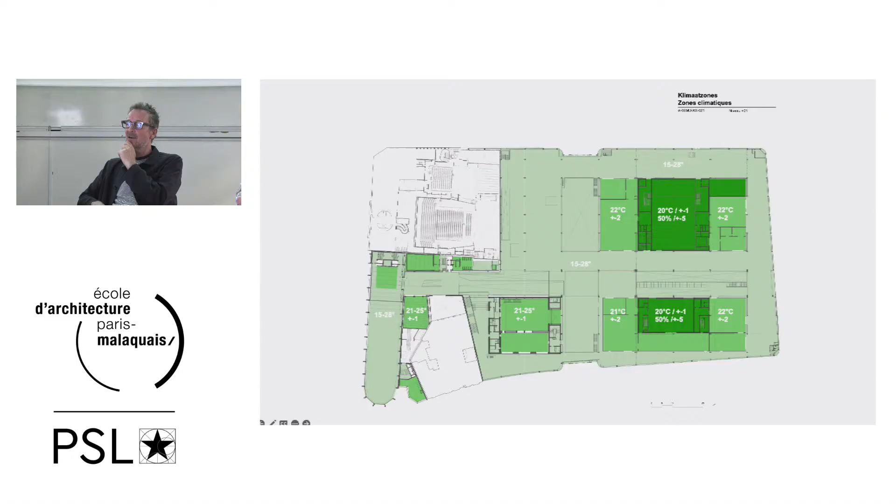It was impossible to imagine climatizing the whole of this workshop without radically changing its character. So what we did was develop what we called an onion concept, which was to concentrate the required highest level of climatic provision in the most compact volumes. So the 3 houses are all highly climatically controlled, and then a second layer of glass houses, part of this onion, provides another level, a secondary level of climatic control, no humidity.

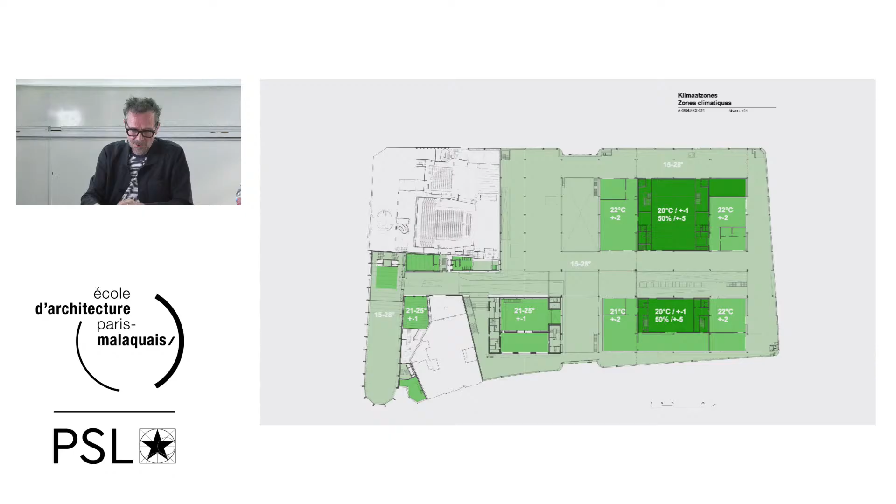So the main galleries are 20 degrees plus and minus 1 with full humidity control. The galleries alongside are 22 degrees plus and minus 2 with no humidity, and then most of the space is slightly controlled from outside temperatures, 15 to 28 degrees, with natural ventilation through the facades.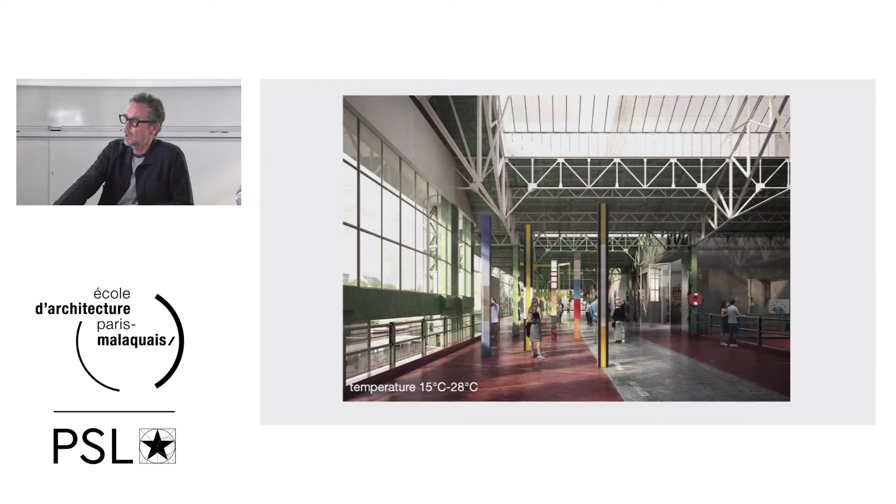So you can see, for example, at the competition stage, the main gallery level. In fact, this is the top floor gallery, the glass houses that adjoin the main volumes, and the workshop space, of course, all open for installation and performance, but also to be left empty.

The idea was that this space between would be a city within a city, a covered public space. There are minimal interventions made to preserve the industrial authenticity, but also the granting of new uses and the recognition, a consciousness of new uses.

This is the scary AI. You'll see a few people kind of morph into different people if you watch carefully.

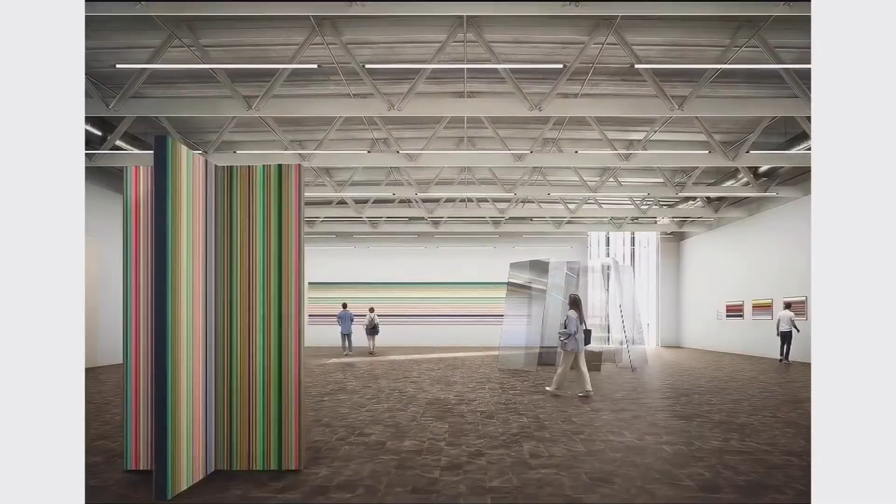There's a kind of exciting simultaneity that's offered in such a big building, where when the building opens in November, there'll be 10 different events going on at the same time. That sense of how do you make comfortable space in such a big volume?

And I think these 3 houses and the spaces between them allow you to actually find yourself completely alone in the building.

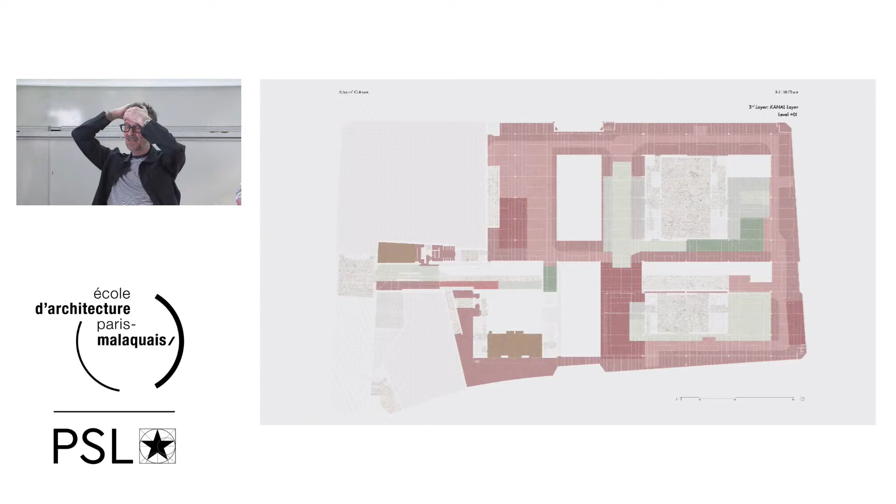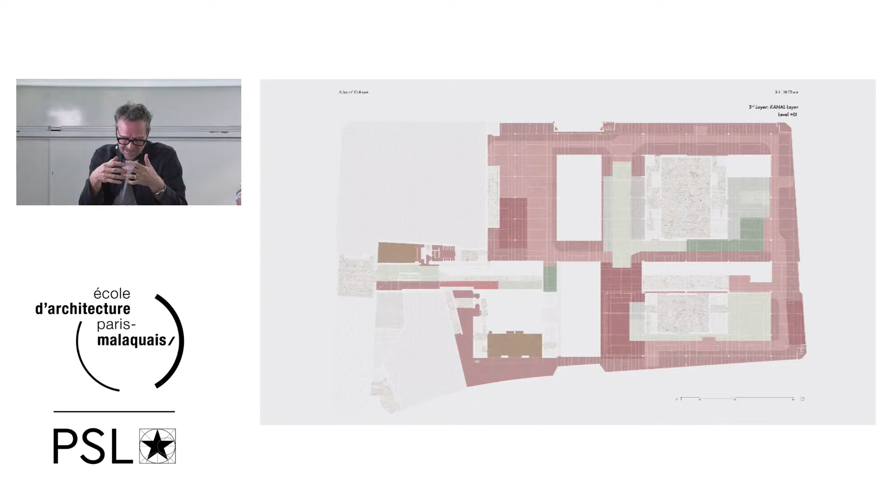Just to add, in a way, because this is a project that could take a day to describe, but there are 2 other aspects I wanted to touch on: the colour and furniture strategy. They really were part of this open-ended collaborative process in which we then developed the colour concept, collaborating with artist Sarah Smolders, and indeed the bespoke furniture system.

But the colour strategy starts with an idea of the floor. This is the final layer of 3 different layers that the floor is painted, that trace and reflect the various patterns and colours indeed that have been applied on the floor over the last nearly 100 years.

And the intention is that they will wear away, because it's floor paint. Certain areas will wear away, and what you'll see underneath is the layer below that. So there's a sort of conceptual idea of the traces of the past applied within the floor space.

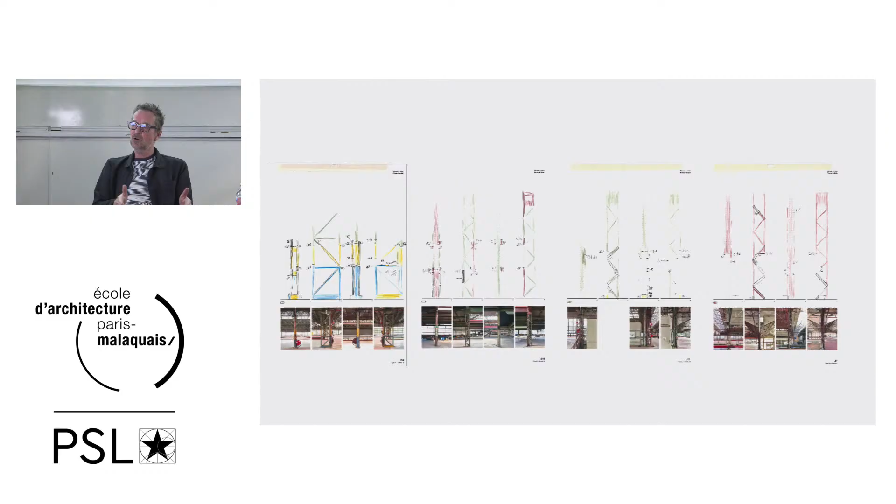While our original intention was to just brush the structure, we then discovered with tests that there was chrome 6 in the paint that could not be exposed to the public. And so we were shocked to have to decide on stripping the colour, all the paint off the existing structure. That led to a collaboration with Sarah Smolders to develop a colour strategy.

And that started by a documentation of every single element in the building, understanding how it found its different coloration.

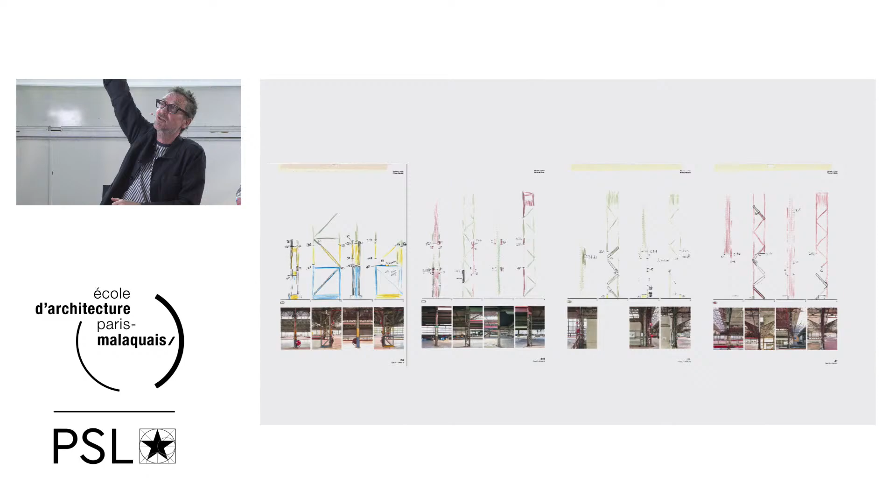An extraordinary horizon layer was discovered, where workers were told to paint parts of the building so you could allocate the parking of cars, and they would just paint as far as they could reach. If there was a step, they went higher. All of this was documented. All the paint colours were recovered from the existing building, and all the new colours are existing colours. There's no new colour.

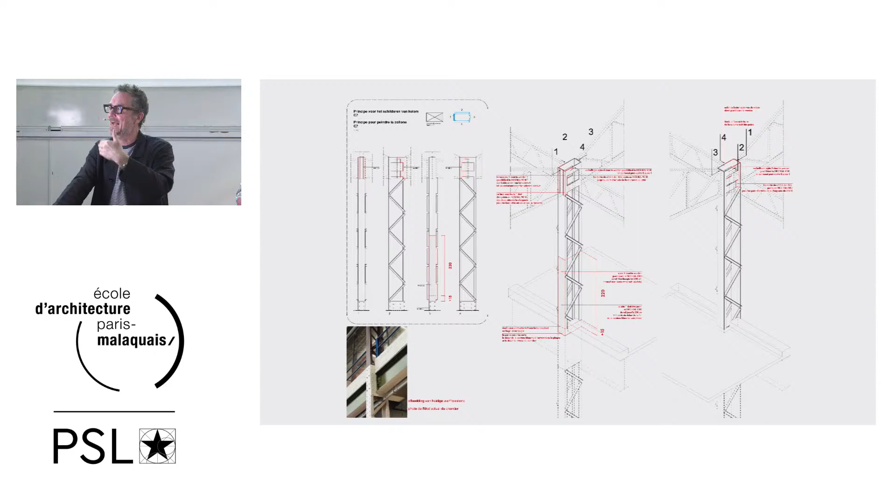New colours are the old colours, but put together in different ways. From her sketches, a very elaborate schedule and definition of how to approach the colour application was then made.

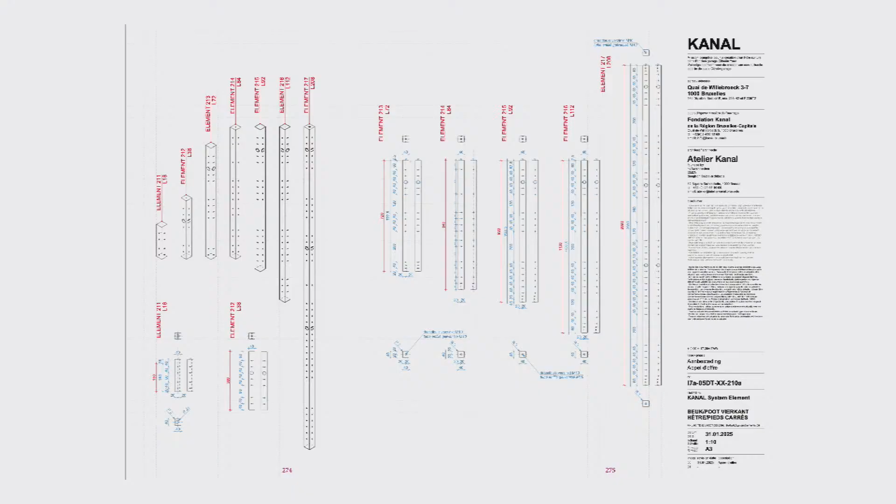In the same way, we developed a furniture system for all the furniture in the building, together with Open Structures, an interesting office in Brussels, who defined a template for working within a 4x4 grid. They also have very interesting ideas of non-authorship. They don't design anything, they offer a kind of network in which visiting artists and architects incorporate. So we chose to join that network and developed a system based on the 4x4 grid. You can see it maybe on the background of the screen.

With a very few formed elements, we were able to develop the language of all the furniture, which can be made and adjusted within a workshop in the building. So many of these pieces will be dismantled and changed as needs must, but they start as a collection of pieces, some with wheels, some without, but all made of very small parts, and all in a way finding their own representative value.

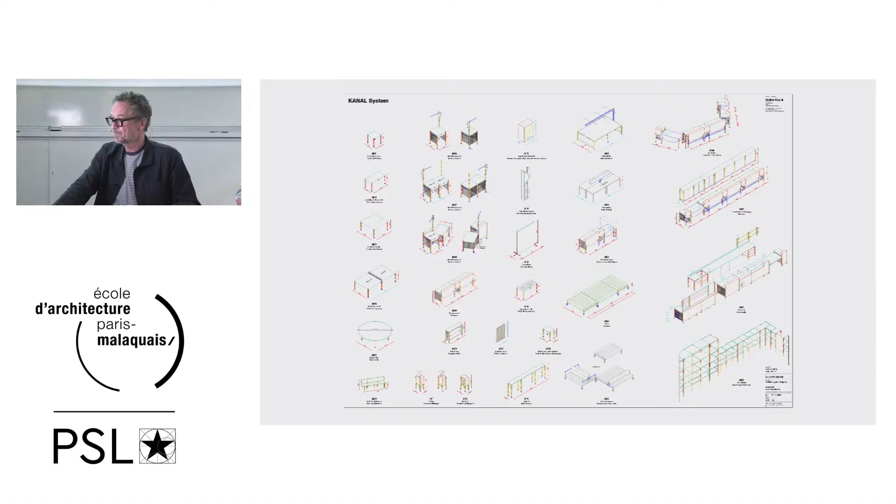So the building becomes a sort of forum for ideas and shared ambitions. And that idea has extended even beyond this, to the commissioning of other designers for some of the smaller installations: the reading room, the bookshop, the restaurant, the brasserie, the cultural market, and a children's playground also by other offices.

This is a building that is big enough to hold a lot. In my opinion, it holds the idea of the 21st century museum, no longer the work of one hand, but by definition the work of several hands, guided by the vision of the original Kanal project, the client also, Fondation Kanal.

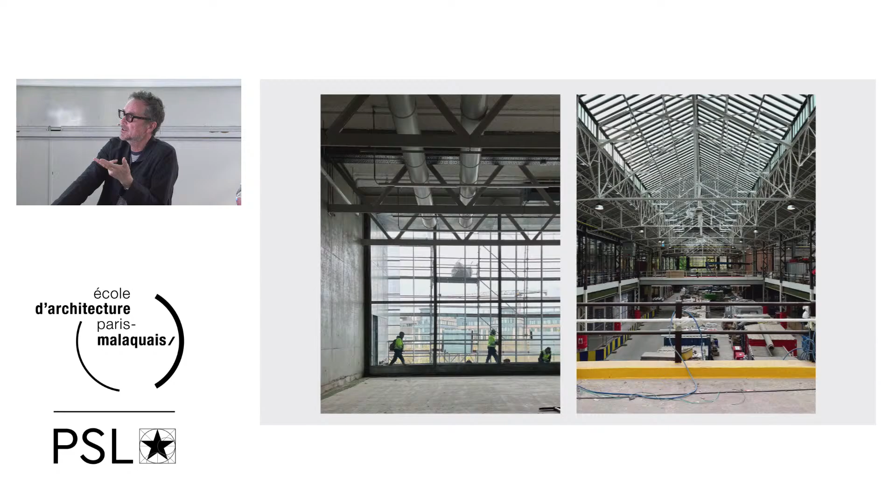And it's a process that's intended to continue after the designers have left the stage. These pictures, taken a couple of weeks ago, show the top floor gallery with a loggia that overlooks the city. This is, on the right-hand side, a view of the street at the entrance.

On the left, a glass house. You can already see the painting of the floor showing these delicate traces of spaces that used to exist. And the basement gallery with its two massive turned columns, 5.5 meters to the underside of the beam, 7 meters to the underside of the ceiling.

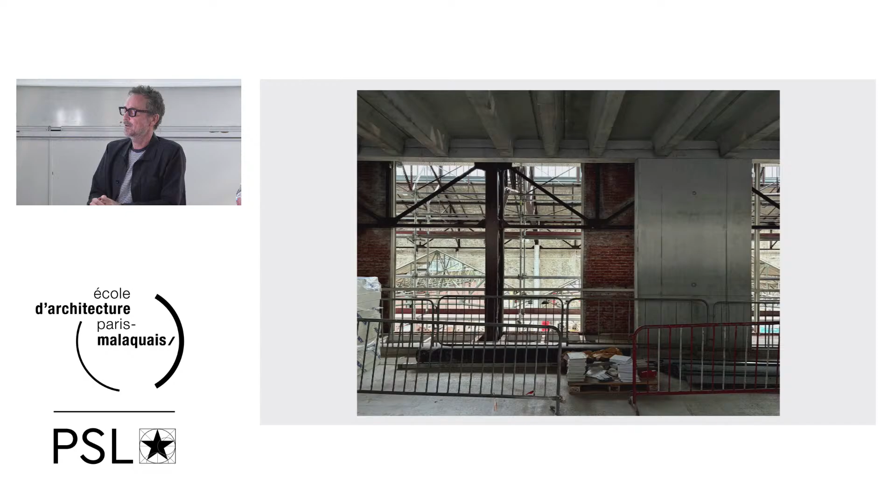I finish with this image, which I feel encapsulates the project and this idea that I started with, of layering the new with the old, a kind of sympathy and balance, a sort of democracy of all the components, all the ages of the building, to form a new whole, that not one is dominant over the other, but they become a kind of mesh, a lattice, a layering of spaces between that can be appropriated.